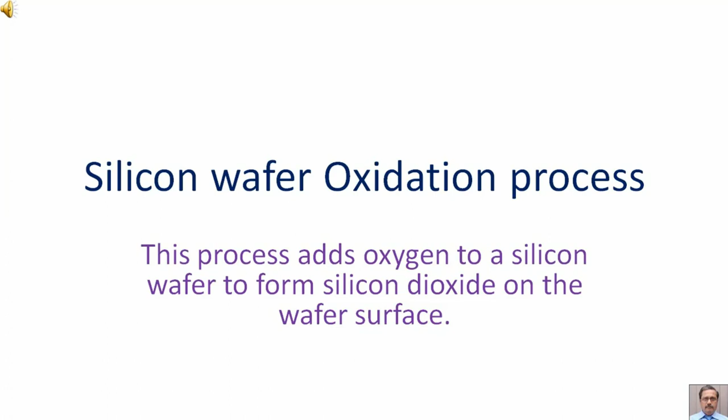Silicon wafer oxidation process. This process adds oxygen to a silicon wafer to form silicon dioxide on the wafer surface. The oxidation process is one of the most important thermal processes in semiconductor chip manufacturing. Silicon reacts with oxygen very quickly and forms silicon dioxide on the silicon surface.

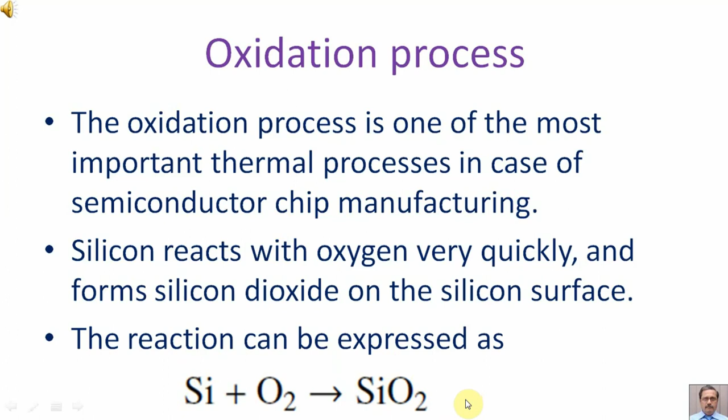The reaction can be expressed as shown in the equation. Figure illustrates the silicon oxidation process. In this figure, we can see the gaseous oxygen, then we can see the original silicon surface, and here is the native oxide layer.

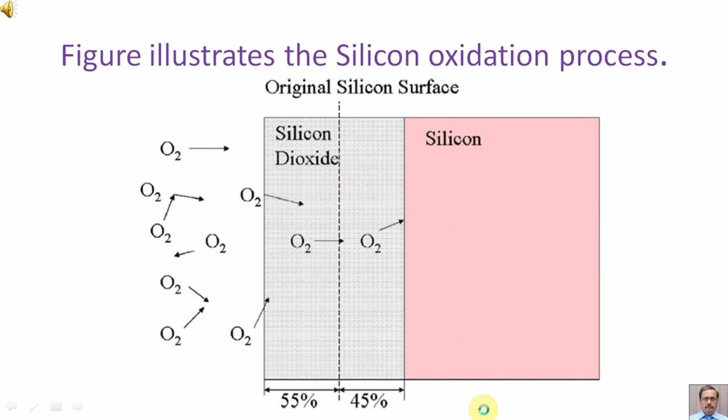Silicon dioxide is a dense material that fully covers the silicon surface. To continue the oxidation of silicon, oxygen molecules have to diffuse across the oxide layer to reach the silicon atoms underneath and react with them. The growing silicon dioxide layer increasingly blocks and slows the oxygen.

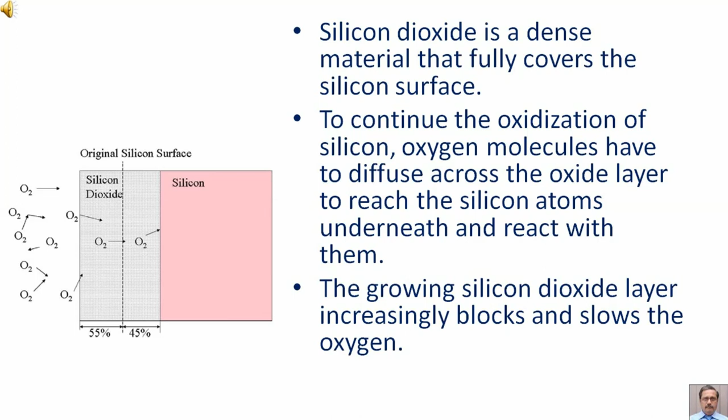When bare silicon is exposed to the atmosphere, it reacts almost immediately with oxygen or moisture in the air and forms a thin layer, about 10 to 20 angstrom, of silicon dioxide called native oxide. The layer of the native oxide is thick enough to stop further oxidation of the silicon at room temperature.

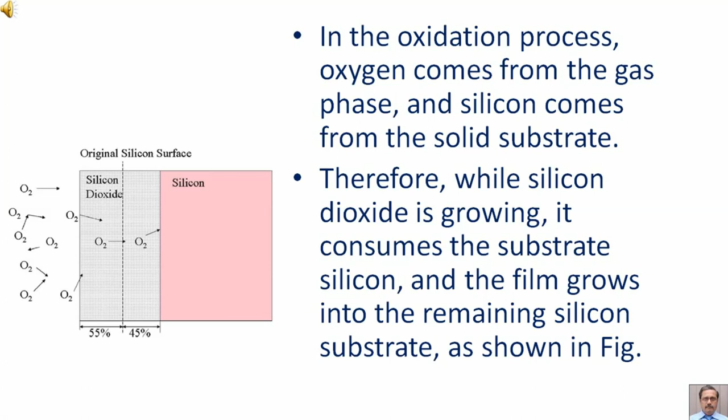Oxygen is used as an oxidizer in processes such as thermal oxidation, CVD, and reactive sputtering deposition. It is also commonly used in etch and photoresist stripping processes.

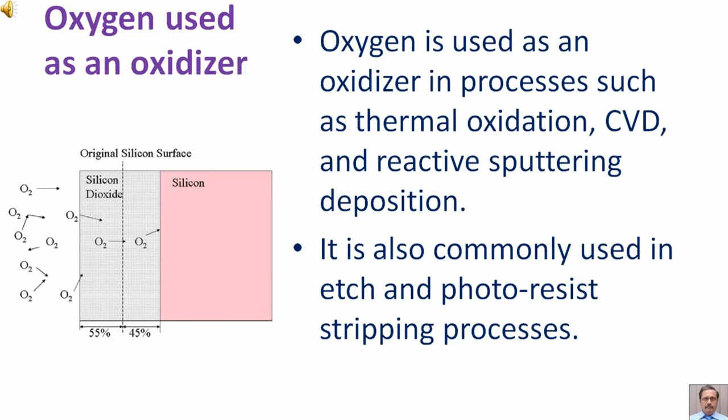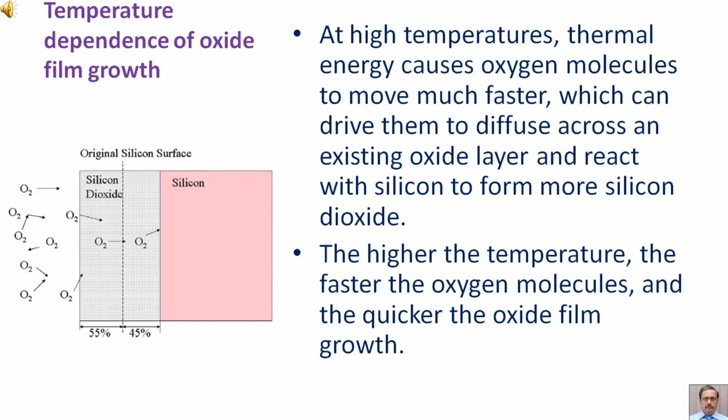At high temperatures, thermal energy causes oxygen molecules to move much faster, which can drive them to diffuse across an existing oxide layer and react with silicon to form more silicon dioxide. The higher the temperature, the faster the oxygen molecules and the quicker the oxide film growth. The oxide film quality is better when grown at higher temperatures.

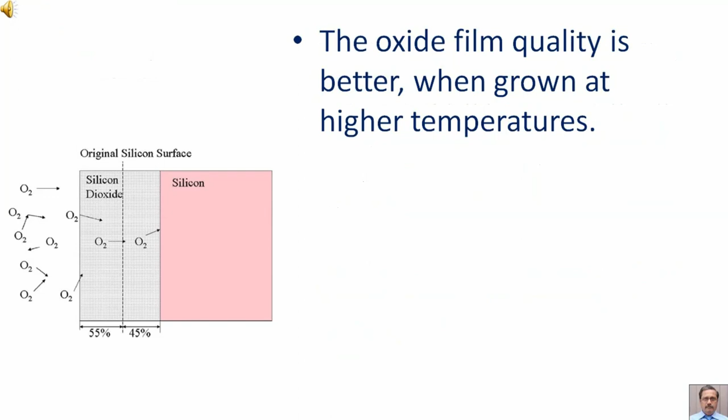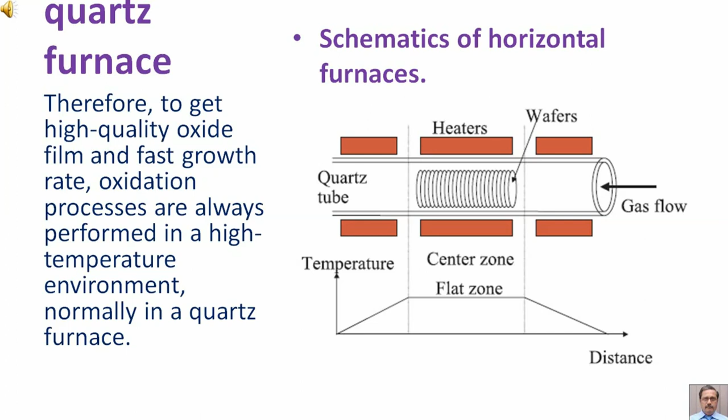Therefore, to get high quality oxide film and fast growth rate, oxidation processes are always performed in a high temperature environment, normally in a quartz furnace. Oxidation is a slow process. Even in furnaces hotter than 1000 degrees centigrade, a thick oxide greater than 5000 angstrom still takes several hours to grow.

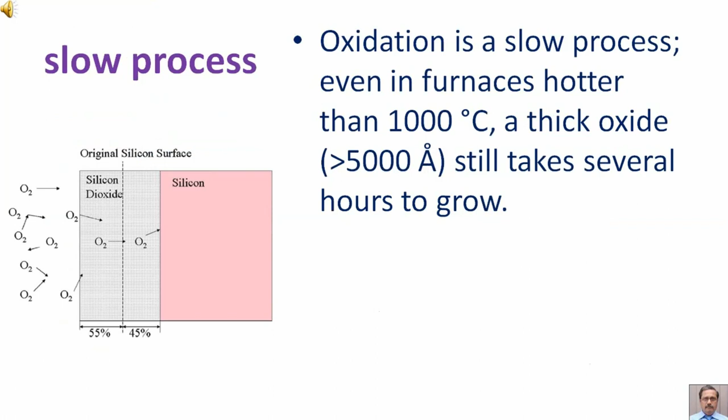Therefore, oxidation processes usually are batch processes with a large number, 100 to 200, of wafers processing at the same time to achieve reasonable throughput.